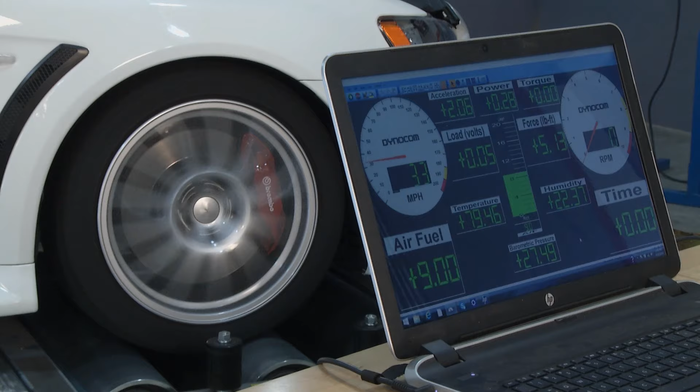This week on Performance TV, we're ramping up our power and torque on the dyno, installing new injectors, fine-tuning the ECM, and even learning how we can get custom logos on our tires. Next on Performance TV.

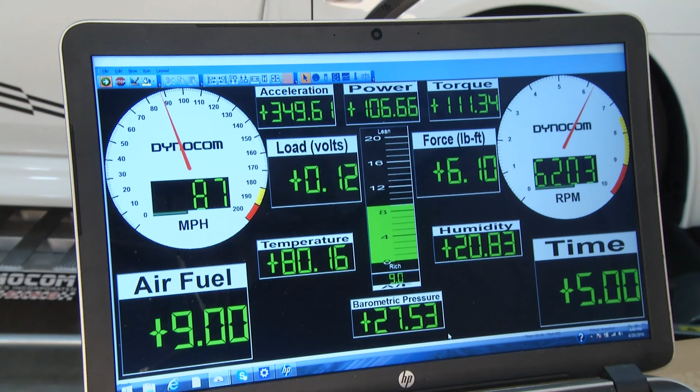Wow, there is nothing like the sound of putting a car through its paces and hearing it at full RPM on the dyno. Hey, welcome to this week's Performance TV, and that's what we're going to be doing today, is playing around on the dyno. JT joining us from Knoxville Performance, and now we've got the vehicle on the dyno.

You've just run it through what we're going to consider a baseline run. So what are we going to see here on our results? We're going to see horsepower and torque. Here we have our torque curve, and here our horsepower curve. Now this is a baseline off an aftermarket turbo kit we installed, and this is the base tune file that comes with the kit. As you can see, I think this kit made, you got 229 horsepower and 179 torque.

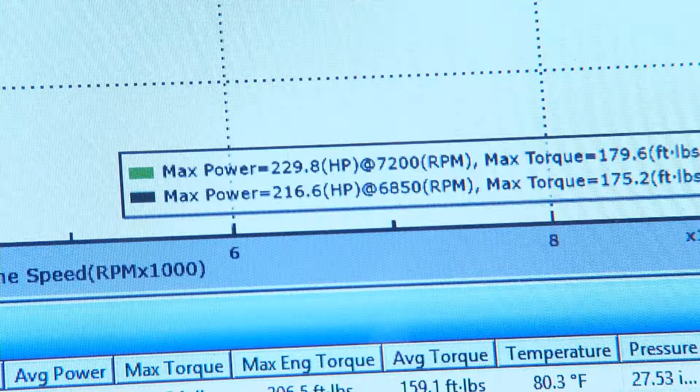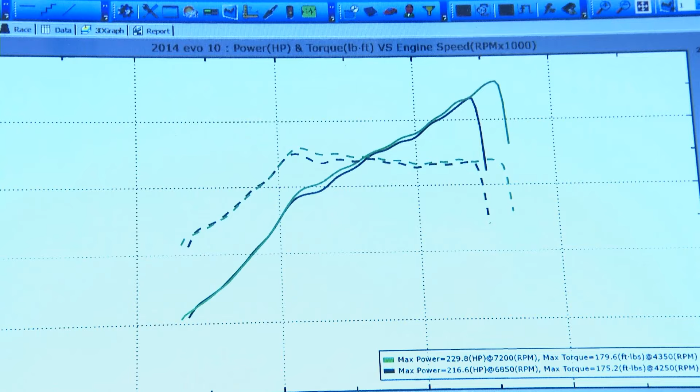So why would we want to put a vehicle on a dyno? Well, first off, you can see a lot of things, and it's a controlled environment. Tuning on the street is absolutely not safe. Sure, we can agree with that. The other thing is that on the street versus dyno, if you're trying to do any tuning, you're not going to see any changes as far as torque and stuff. You can't see that. One of the biggest things with a dyno is you're seeing live results.

And with certain dynos, you can even see your torque while you're sitting there loaded on the car. For instance, this dyno we're using here, it's an eddy current dyno. It allows me to actually watch the torque as I'm tuning, without making a pull and then checking it.

Now, once you look through all of the different RPMs, it gives you an idea of what I'm looking at here, which is increases in these numbers, to a point where we don't see any more increase. If we start seeing a drop, then we know we've gone too far.

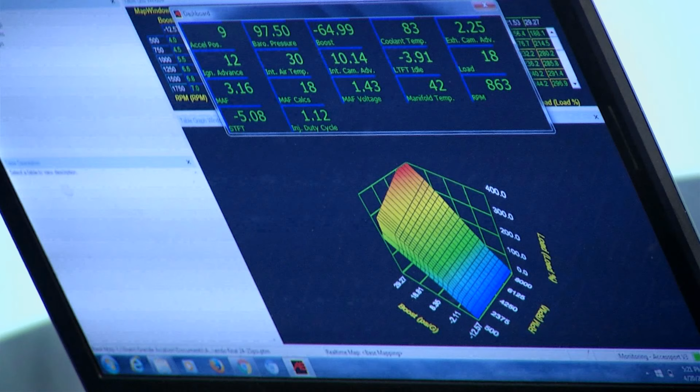Okay, we have our baseline run. What plans do you have for this before we make our next pull? Well, our next pull, we're probably going to make some adjustments to timing. We're going to look at the tune file, probably maybe raise the boost up a hair, see where that's at.

And we're not going to be getting out wrenches and tools and all that stuff and getting underneath the hood? No, not at all. This is all done on a laptop on the car. Now, not to say you don't have some problems on the dyno here and there, but when you do, you address those with those tools. All right, well I don't know about you, but I'm ready to see some results. Yeah, all right, let's go ahead and get ready and reprogram that.

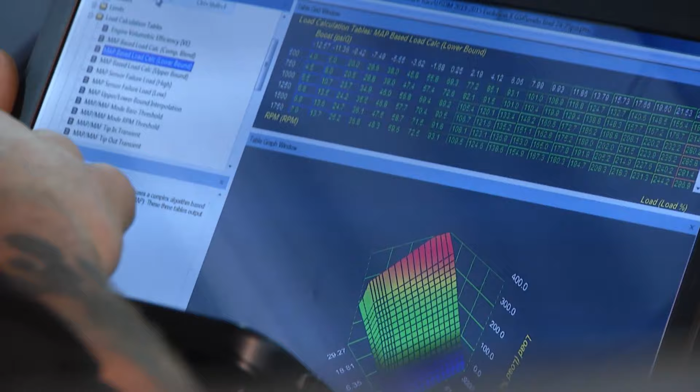All right, so I've made changes to multiple parameters in the car on the ECU tune file. So what I'm going to do now is actually flash the map to the car. It'll ask me to do a couple prompts, it'll connect, and then it'll do a flash, and I have to have the car off to do this. Tells me to turn the key off, and back on, and we're ready to go.

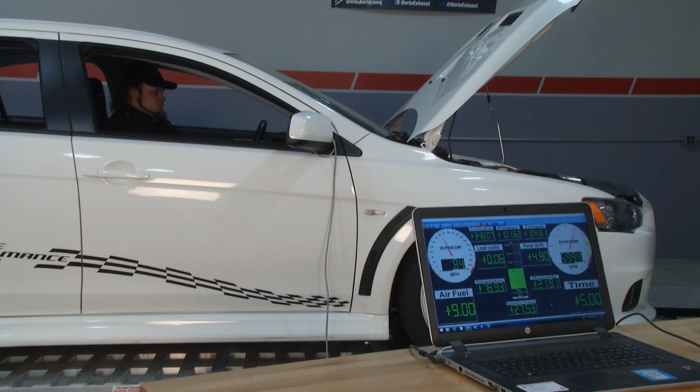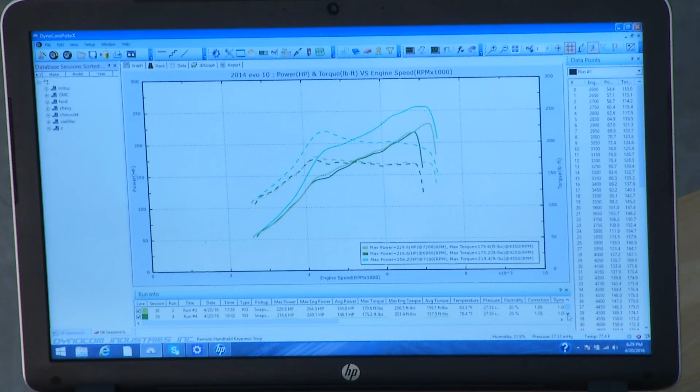Anxious for JT to come over here and see what kind of numbers that we have now, and this is definitely looking pretty interesting. Yeah, definitely big increases in power and torque, and you're going to see that with any tuning you're going to do on a dyno versus something that's just out of a handheld.

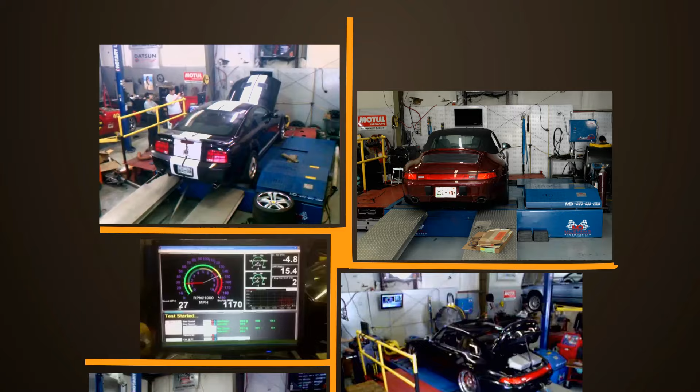Well, at Knoxville Performance, you know, we see the car that we have here today, but you don't work just on stuff like this. I mean, you guys do all different types of tuning. Oh yeah, I'm familiar with multiple tuning systems, from stuff with GM cars, Ford. We've tuned all kinds of stuff, even worked on some Ferraris, Lamborghinis. We're very versed in multiple vehicles.

Everything from cars to even some truck stuff too? Yeah, we have done some truck stuff. We've worked with a couple of Dodges and Fords and Chevys, from installing to exhaust to custom tuning as well.

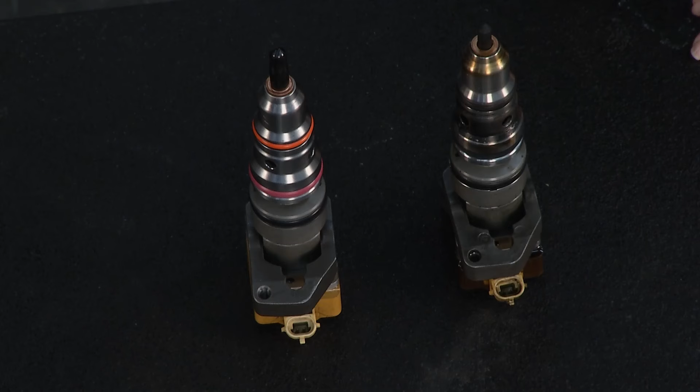Yes, we're constantly rebuilding the injectors for the 7.3s. A lot of them every week, 40 to 50 sets still to this day, after they've been off the market since early '03.

What are the biggest problems that folks with a 7.3 are finding with the injectors? Cold morning starts, especially in wintertime. They start to run rough during the cold morning. As the temperature comes up in the motor, they'll start to run a lot better, but it's all due to pretty much lack of maintenance, extended oil changes, stuff like that.

We're looking at a stock injector here. Correct. We do have a 7.3 here today that we're going to do some changes with. What step are we going to go to from Full Force?

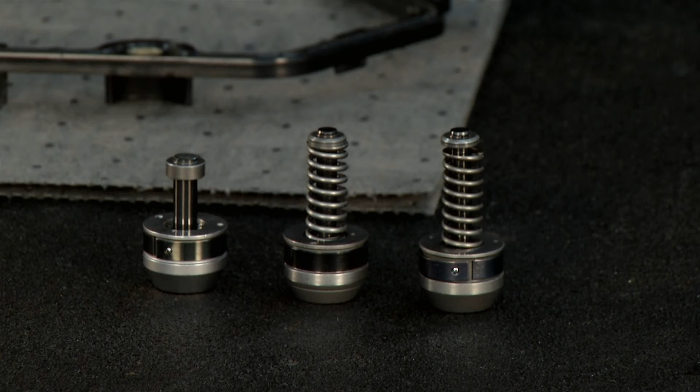We're going to be doing the switching out to a Stage 1 injector. It's going to be a single shot injector. What we're going to be taking out is a split shot injector, which was just the stock injector that came with the trucks. They went to those in early '99 all the way to early '03.

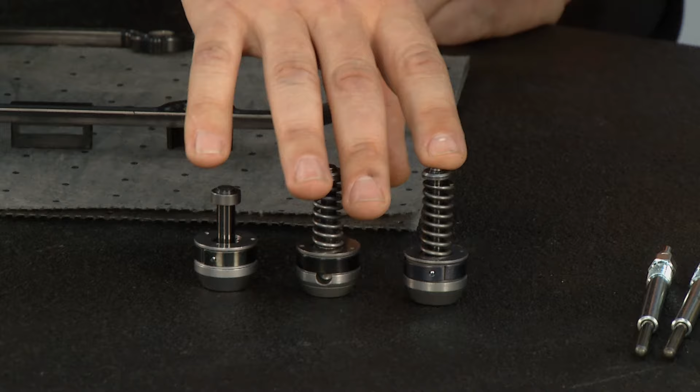And that's something we were not able to see from the outside. That's internal, a plunger and barrel that is inside the injector that is changed out. We've got the split shot, which is the stock one, and then we will go to a single shot, which is just one main shot of fuel going into the cylinder instead of the 2 shots that came stock. So we're going to do the injectors.

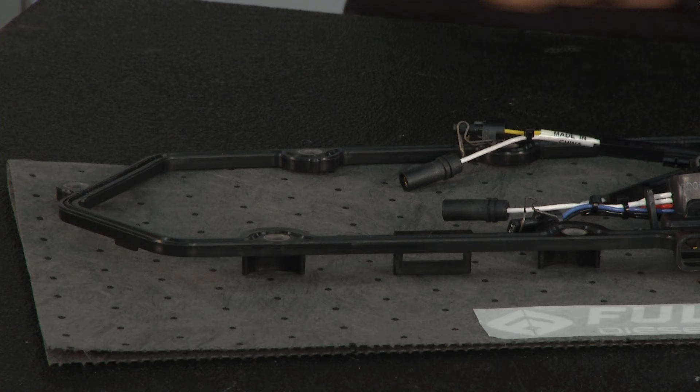We're also going to change out the glow plugs. We recommend changing out the glow plugs when you're doing the injectors, since you're in there anyways. The other thing you can change out is the harnesses and the valve cover gaskets themselves. It's always recommended that you go back in and change those, since you're there, might as well do it. Absolutely, because just getting to all of that is the biggest part of the thing.

Dave's already got a lot of these changed out, let's check in and see how far he's come along.

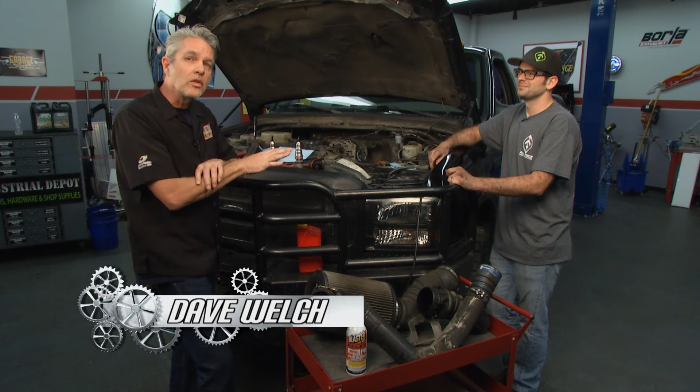We've got Patrick from Full Force to give us a hand here. Now, I know this looks a little complicated, but it's not that bad. We just put a little PB blaster on our brackets and on our clamps, and they came off nice and easy. What do we got going on now, though?

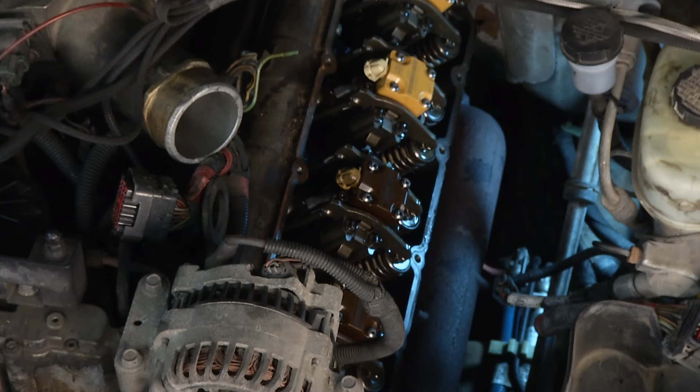Today we're installing our Stage 1 injectors. This old farm truck is going to get some new life, just making it a good running truck and a reliable vehicle for the customer. All righty, show me how you do that. Well, first we're going to take the deflectors out after we drain the oil rails.

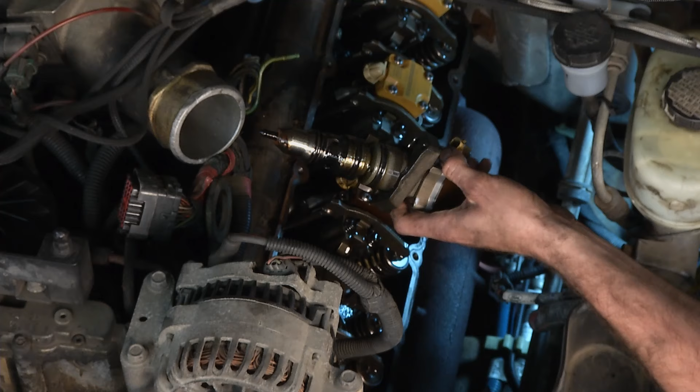Drain it back into the engine, that way you don't make a mess in your driveway, especially if you got concrete. We'll set it up on some clean rags. All right, and the same goes for the rest.

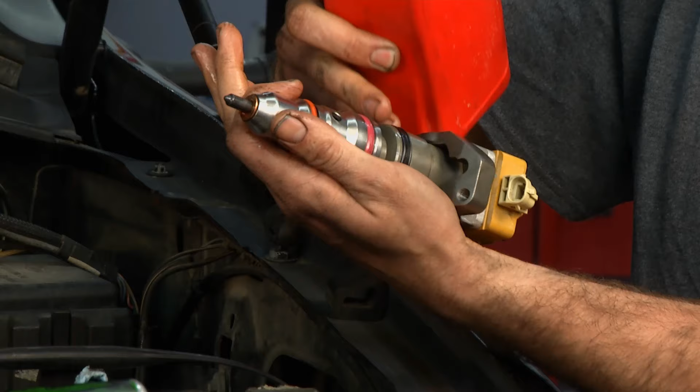It's got 3 different O-rings on there. You've got the oil side up top, in between here, anywhere from 500 pounds to start it, up to 3,000 PSI. In between the oil side and the orange O-ring is the fuel side. The average truck, stock truck, about 52 pounds.

So it's unusual. And when you're torquing these down, you're torquing it down to what? 120 inch-pounds, not foot-pounds. All right, and if you do not have an inch-pound torque wrench, about 10 foot-pounds will suffice. We're going to go ahead and finish this up. While we're doing that, you check this out.

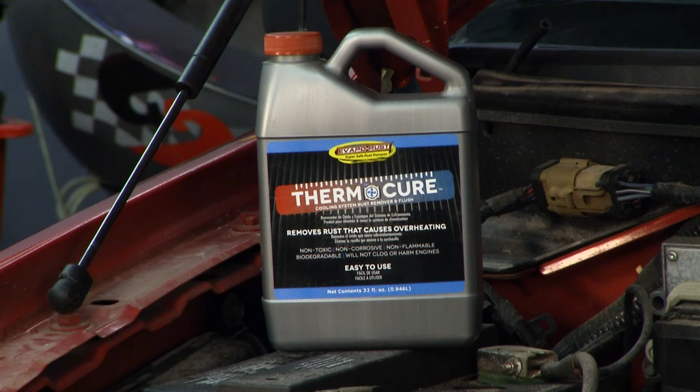One problem older cars can have is overheating, and this can be caused by rust that's built up in the cooling system. This can cause a lot of problems, and traditionally this problem has been hard to take care of. Now we've got an Evapo-Rust product called ThermoCure.

ThermoCure is really easy to use. What it does is it goes in, absorbs all the rust out of the entire cooling system, heater core, everything, makes it liquid, and then you drain it out.

This is really easy to use. You start off by draining your radiator like we have here. You can see how nasty that is.

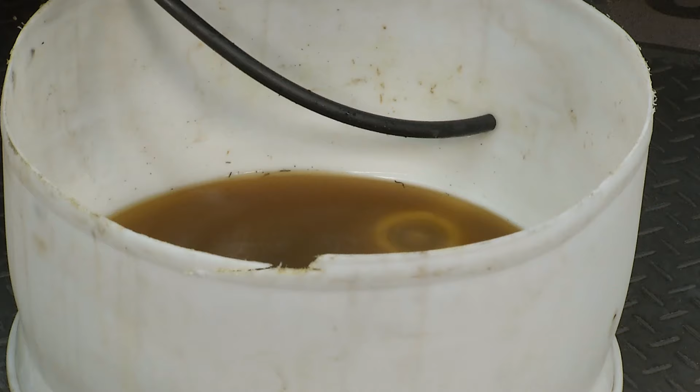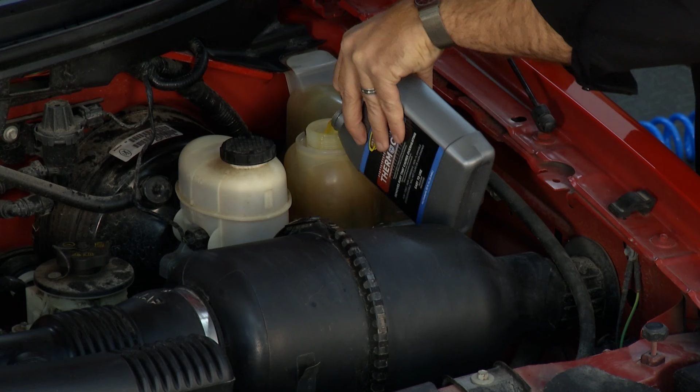Once it's out, we add water, and then we add 1 quart of ThermoCure. We're just going to add it in there, fill it all the way up with water.

This isn't going to hurt any of the rubber or gaskets in the engine? Not at all. It's not going to hurt aluminum, copper, brass, tin, gaskets, any of those kinds of things. Fill it up with water and then drive it around.

Don't drive it in cold weather, because it doesn't protect against freezing, but it does protect against overheating. Once you've done that, give it 4, 5, 6 hours, depending on how rusty you think it is. Drain that out, flush your engine completely, then fill it with good coolant, and you're ready to go.

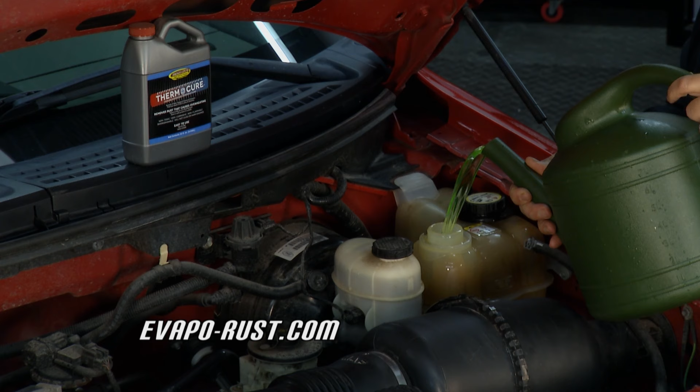There we go, not too bad. Running good. Thanks a lot, man, I really appreciate you setting up my truck. No problem, Dave. So I don't need no degree in engineering to do this? I can do this in my driveway if I want. That's right.

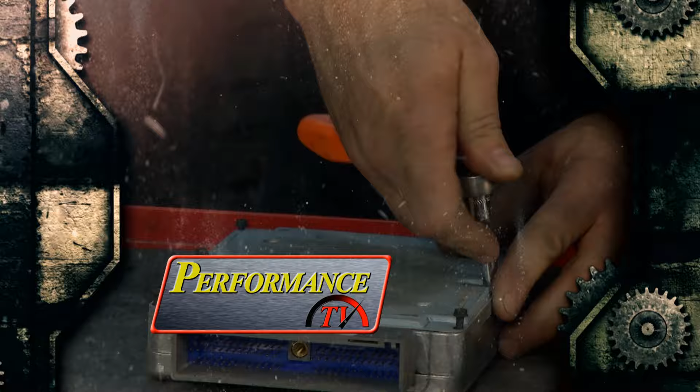Welcome back to Performance TV. Hey, if this Ford F-350 looks familiar, that's just because we installed new injectors in it, bumped it up to stage 1, and now that we've done that, we get to have a little bit more fun with performance and build more choices, and that's what you have for us with Power Hungry Performance.

What have you been doing under there? Trying to get the computer out from under here. So this would be the ECM? Yeah, this is the Ford ECM on the 7.3, and that's where our chip is going to go.

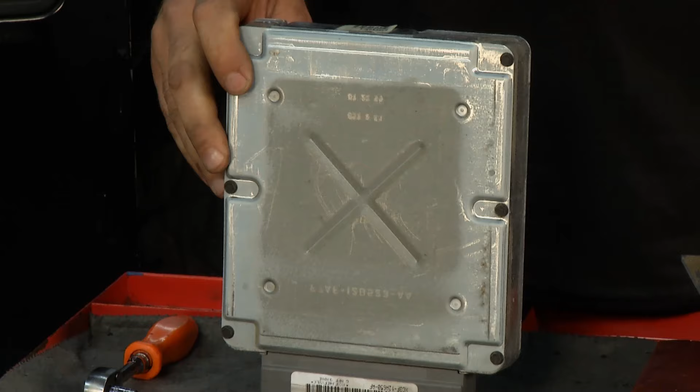So what we're going to do is take this over here and get this cleaned up. Why would we need to clean it? When the PCMs are manufactured, they have a layer of silicone on the circuit board to prevent water damage, and we need to get that off so when we plug the chip on there, it makes good contact.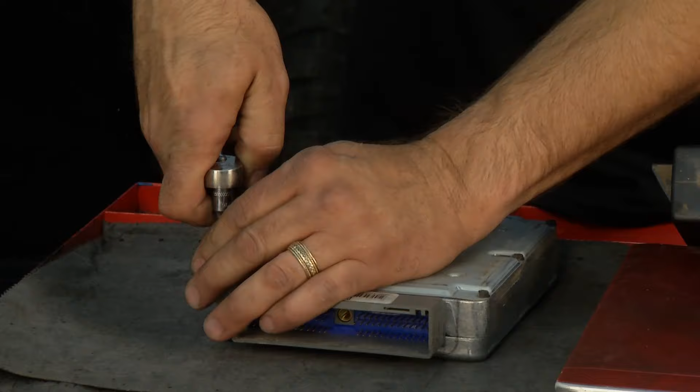This isn't just any particular chip where we're going to plug one in and it's all done. You have no choices. If anybody knows me, they know I like to have control over things, and we're going to have lots of control, lots of convenience, and lots of choice.

What we're doing is the Hydra chip we have has 15 different positions, giving you any number of positions for towing, performance, daily driving, even anti-theft. We have a no-start position on the chip that would prevent your vehicle from being stolen.

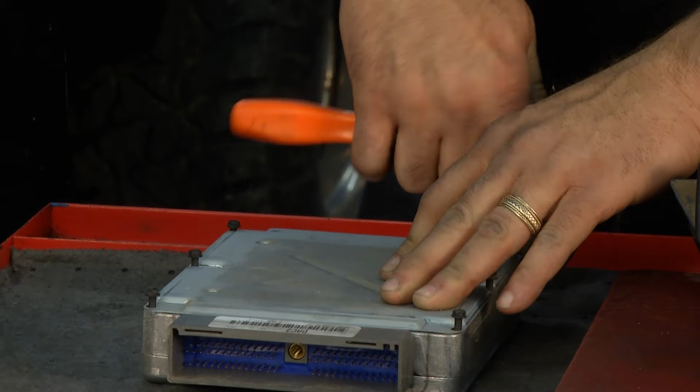We're going to go ahead and get in here, just a few screws we need to take apart so we can get into where we need to clean this up. And I see you have a wire brush. Yep, there's a wire brush, and we've got a piece of Scotch-Brite we'll use for the final polish on the contacts. Once that's all clean, we can go ahead and plug the chip on and get it reinstalled back inside the vehicle.

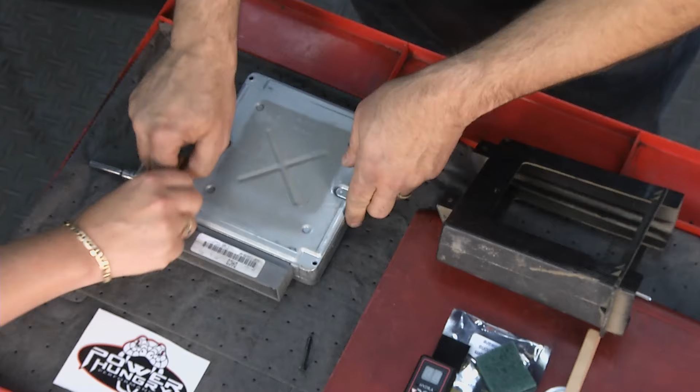Okay, go ahead and get this one out for you. Pull those out. And pop that apart, there we go. So there's the contacts that we have, you can see the layer of silicone on there.

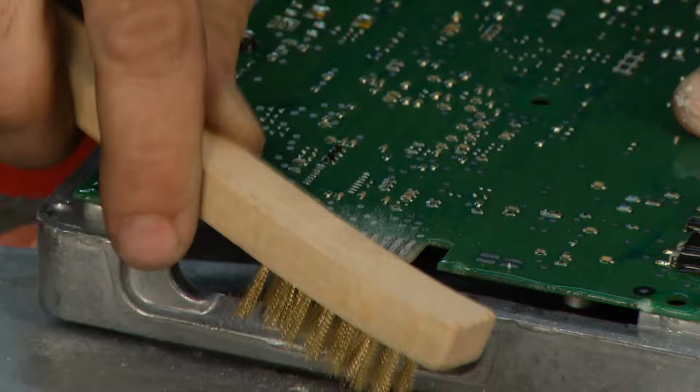It all scrapes off, so we'll use the wire brush to go ahead and get that cleaned off. You want to make sure you use a brass brush, not a stainless steel brush, because the brass does not hurt the circuit board. Okay, that's what I was concerned with looking at that. Well, this is going to take a few minutes to get this cleaned up, and while we do that, why don't you take a look at this?

This week on the Z-Max Micro Lubricant Minute, we're going to shift things up a little bit and talk about the Z-Max transmission formula and what it will do for your transmission.

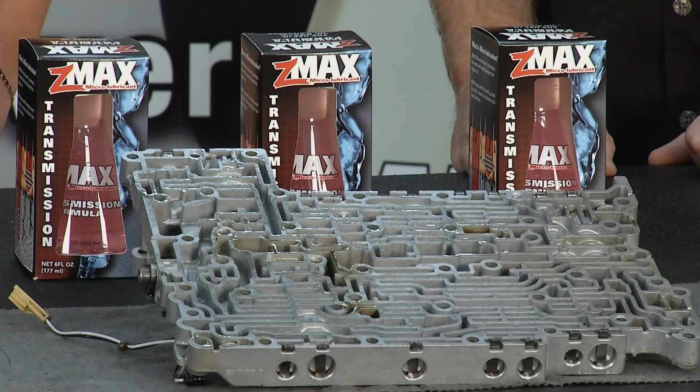Whether it's an automatic or manual transmission, there's a lot going on in there, especially when we look at our automatic transmission valve body. The fluid needs to be able to move around and do its job, and if things start sticking, it's not going to work right.

Z-Max is a metal treatment, not an additive. It's not going to change the oil in your transmission.

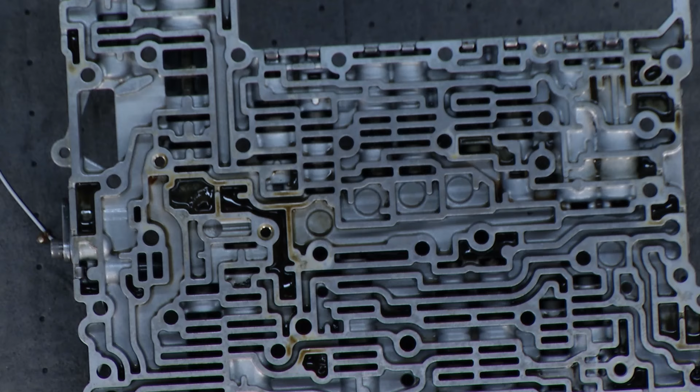You see on our valve body, for example, what the varnish and buildup looks like. It's pretty obvious to see, you can see the change in color in the metal. This is what the buildup is in your transmission. This transmission probably had a failure because the buildup in there is not allowing the valve to slide.

Z-Max will treat the metal. It's going to last longer, shift better, perform better. It's just going to make it last so much longer.

People want to know, how does that buildup get in there? It's from the heating and cooling cycles. It allows the oil to stick, varnish builds up, and then things aren't going to operate smoothly.

Z-Max allows the metal to be really slick, almost a wet surface. It's going to let the oil slide through there. The Z-Max will stay in the metal - once you shut that vehicle off, it's still in the metal.

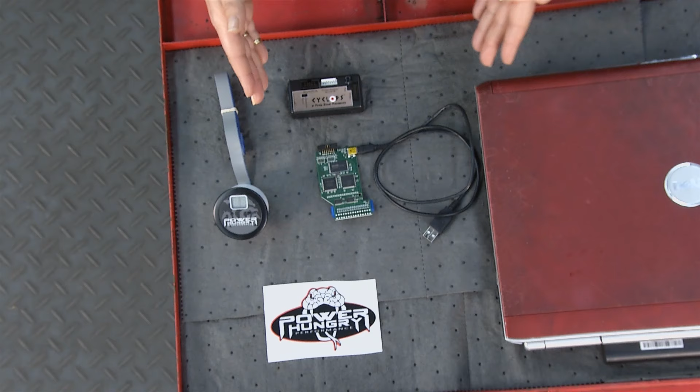Bill's had an opportunity to program the Hydra, and now he's wrapping up the installation inside the truck. One of the really neat things about programming it is that it plugs right into the computer - you can see with our USB cord that plugs into your laptop. You don't have to burn anything to be able to program the Hydra from Power Hungry Performance.

They also have a lot of really neat accessories that you can add to make this your own. Of course everything comes with a kit, but if you happen to have pillar gauges, you can put a controller right in your pillar gauges. How about control it with your phone? They even have a Bluetooth option that you can put in right underneath your dash.

Bill, are you getting her all wrapped up back there? Just finished up right now. Now, how many different programs did you put into the Hydra on this truck? We did 7 tunes on this truck. This truck has modified injectors, so we had to do some custom tuning for it.

The nice thing is it's still open to do all kinds of things should this gentleman make some additional upgrades. If he changes the turbo, puts a different transmission in it, anything he'd want to do, we can redo the custom tunes for him. He can download them right onto his chip from his laptop.

Now, we've concentrated on the 7.3 today, but you guys have all kinds of different stuff. We've had you with us before with the 6-liter, and you have programmers, all kinds of stuff on your website. Yeah, we do - we carry products for the 7.3s, 6-liters, 6.4s, F-150s, programmers, chips, a wide variety of stuff for Ford vehicles.

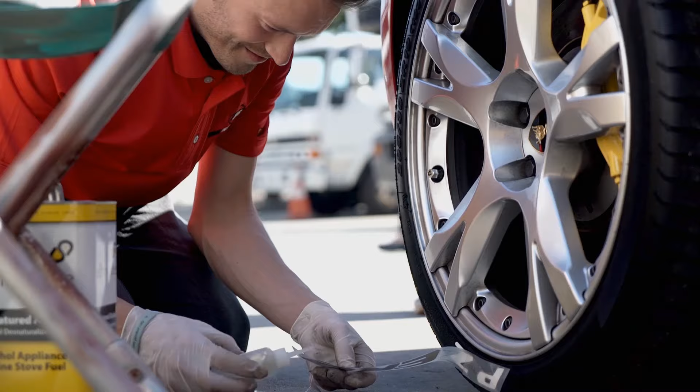So people can also go in there and get the installation done there. And then more recently, we released the ability to purchase a tire pre-labeled by us, professionally installed at our shop, and then sent to your door. So you can call us up, say you have a Michelin tire, we can pre-label it, and you'll be getting it at your door, professionally installed, and it's going to be on there for good.

Oh, I love that. I'm telling you, we used to joke about this. We did not think it would ever come about. There's just no way you're going to be able to stick something on a tire and actually have it stay. This is just amazing. This is really the first solution to totally customize your tire with any logo and have it last. If I'm doing the temporary sticker, how long does that typically last?

Usually it gets up to about 1,000 miles before it will start to discolor, and then it's just time to remove it. So again, if you're looking to advertise, perhaps for a charity race or a parade, you can put something on there, and then you can take it right off when you're done.

But the lifetime of the tire, even with all the cornering, the heat, because I think tires can get up to 100, 200 degrees or something. Yeah, actually both of the adhesives, the short-term and the permanent, we sell directly to the tire brands, and they can use that for their racing. And those tires get up to 185 degrees, and the adhesive is designed to last over 250 degrees Fahrenheit and also -50, so it can take the cold Canada winters, and it's not going to crack, chip, or fall off.

I got a real problem with catching curbs and scuffing up my letters and stuff like that. But you got some cleaner that's a lot better than brake cleaner or...? Absolutely, yeah. So the cleaner, normal soap and water generally will clean up the lettering pretty quickly. But when you get something like a curb scuff or oil or dirt, we have a special cleaner available on the site that will clean it right up to nice and white even after 50,000 miles.

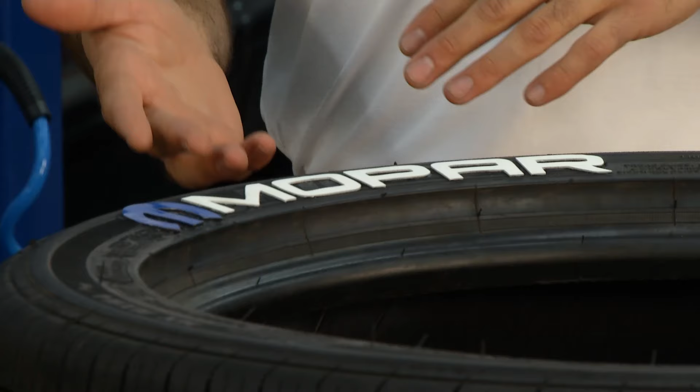So I can put on Dave's Tire Shop, or I can get brand names too. That's absolutely right. We have official licensing with many of the tire companies, whether it be a Toyo, a Michelin, a Goodyear. Those are available. And also we're recently launching automotive lifestyle brands like Mopar, like Hemi, and those are now available through us as well as some of the merchandisers.

If you want to find out more, go to tirestickers.com.